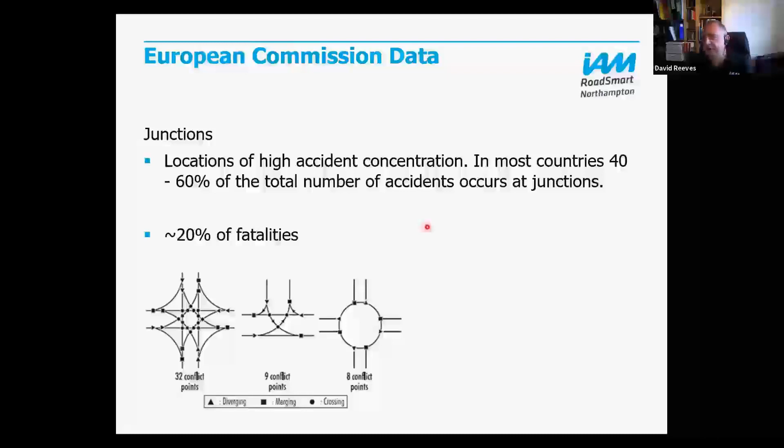It's quite an interesting figure that 60% of the total number of accidents occur at junctions. This is almost no surprise to us IAM-wise, because it's one of the main hazards we consider when teaching people. The interesting other statistic was 20% of fatalities. So although there's quite a high number of accidents, they don't always cause deaths, and that kind of makes sense because they tend to be lower speed, not always, but tend to be the sort of thing that causes injury or just damage only.

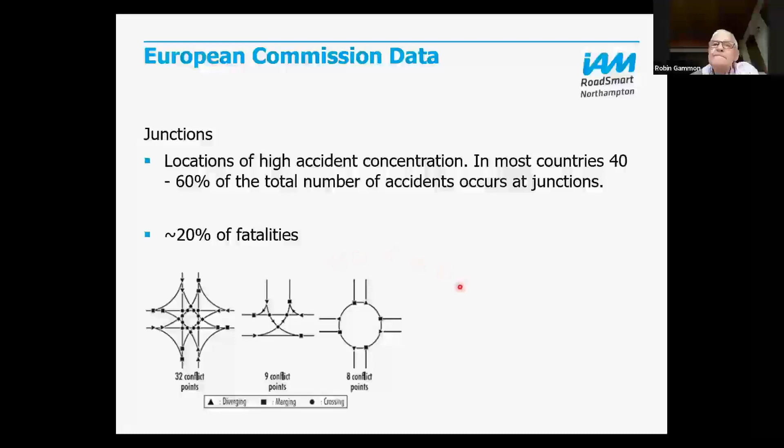Now, from the Roman period onwards, basically we have crossroads and T-junctions and variations on a theme. And for lots of years, the only other thing we could have is a roundabout. They've been around for quite a few years.

From a design point of view, they look at how many different ways on a given junction you can run into somebody. So a basic crossroads like this comes up with 32 conflict points, whereas a T-junction, a three-way junction, has about 9 ways of running into people. More about that in a minute.

This means that over the years, more weird and wonderful ways have been designed to try and limit some of these conflict points.

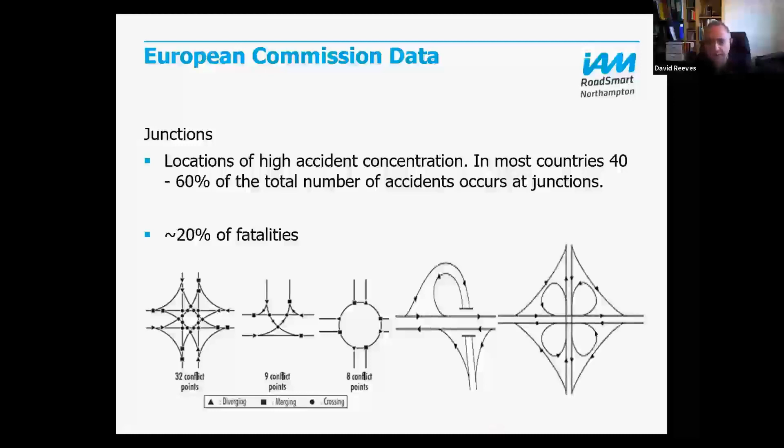Now, it's worth looking at this for a moment. I, on purpose, am taking the simplest one of these conflict points, which is the method that forms the basis of how road engineers start modeling junctions and traffic flows and so on.

So let's imagine here's a bog standard T-junction. If you're going from left to right, you can go straight ahead or you can turn left. Please ignore the slightly dodgy graphics on this one.

Now, of course, when you're pausing there or slowing down to turn left into that side road, somebody could hit you from behind. Alternatively, you might drive into somebody that you haven't seen until you turn the corner. So a lot of what we do in IAM is mitigation for that. It's checking your mirrors, slowing down, signaling, moving down into another lane, getting out of the way to mitigate that risk.

Obviously, if you're going the other way, same sort of thing, you could go straight ahead or turn right into that lane. And the same sort of thing, you could be hit from behind while you're waiting. So again, slowing down, signaling, moving your position and so on mitigates that.

We're also crossing the other lane, so there's now a chance you get hit by a car coming that way. And of course, if you're really unlucky, you could hit the other car that's just turned in.

And then you could be coming down this road, and you can go left or right. If you're going right, you've got to cross the path of other cars, intercepting that one. So there are a number of different places with potential to hit other vehicles, and that's what they call conflict points. That's how they assess the junctions.

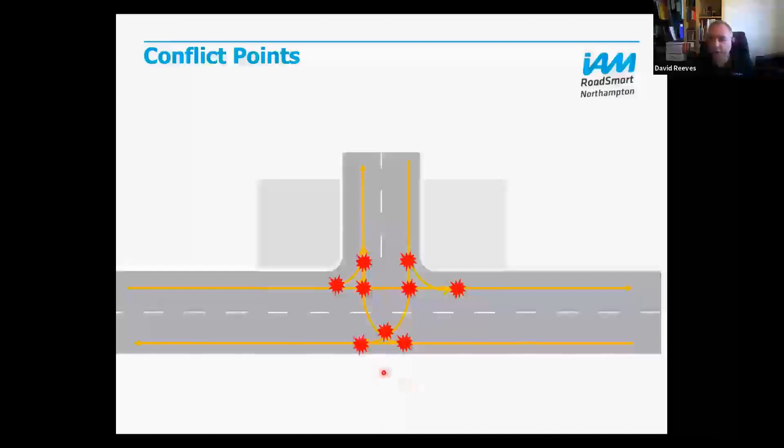But essentially what we're doing—we're not traffic engineers—what we're trying to do is change people's behavior to mitigate all of those different risks. The main ones we've seen are being aware of other road users, good observation, appropriate signaling, and slowing down. But it all comes down to observation largely.

But we can't completely mitigate those risks of other people. Now, a lot of it, though, is done in road design, and I'll come back to that in a moment, but it's worth just looking at that idea.

As I say, I picked this because it's the simplest one. When you start looking at complex roundabouts, they get horrendously complex as they work out all the different ways that you could come into conflict with somebody.

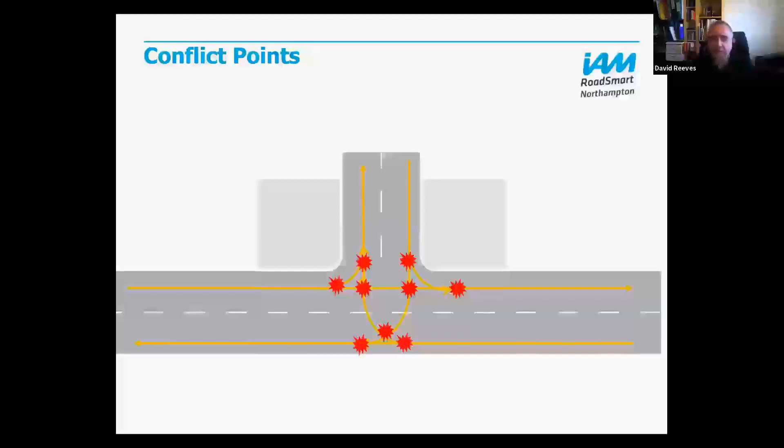So what do we do? Right, worth reiterating the system—I know, or hope you all know this already. I lifted this slide from one of my earlier ones, and with the system, information, position, speed, gear, and accelerate, we've got a kind of 2-for-1 deal for you.

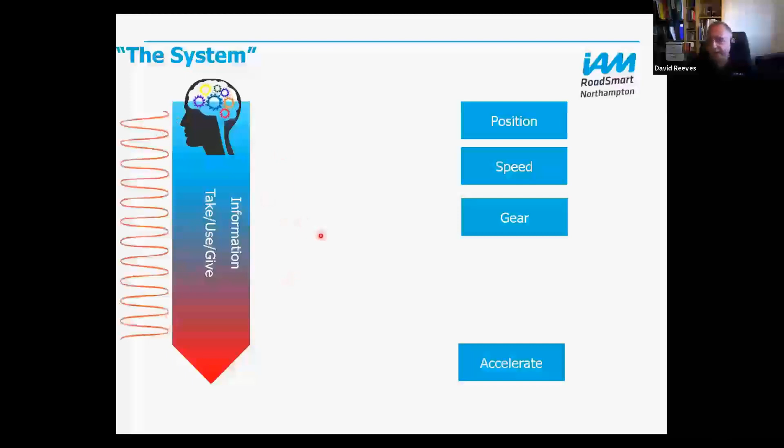It's almost like we've got two different systems going on simultaneously. The first one is taking, using, and giving information. This is very cerebral—it's going on in your head. You're constantly thinking about this. It's high frequency in the sense that for any given hazard, this is going on and on and on. You're cycling around, looking, picking up new information, and using it and giving it.

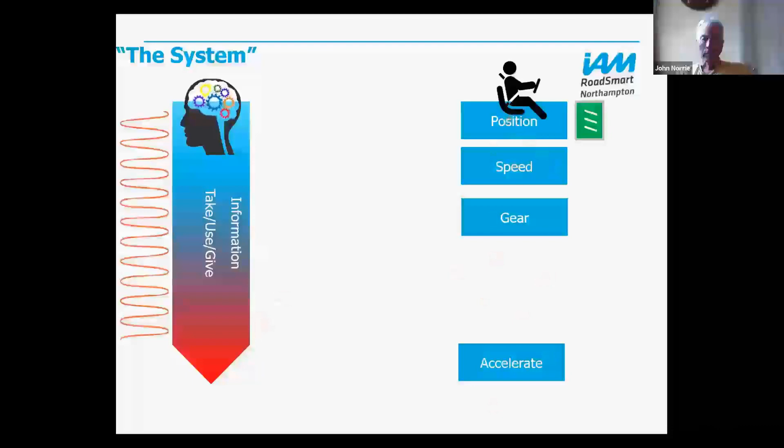Whereas this one is about car control. This is about changing the car's position, its speed. It's related to how far away you are from the hazard and what else is going on. Of course, it's being fed by information that you're taking in. This will control some of this, particularly when we're talking about roundabouts and junctions. But it's lower frequency - it might be that you only use this bit once per hazard. There will be occasions when another hazard occurs while we're approaching a roundabout or junction, and we need to restart this process. But this is typically once per hazard.

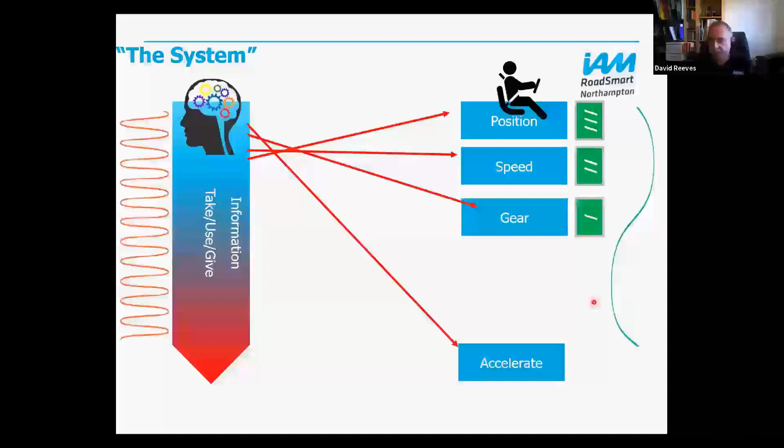Okay, quick recap of the system. We all kind of know that, but it's worth reiterating where we're coming from. This is what it says in the handbook that we should teach our associates. There's a lot about information, and I'll come back to that in a moment. But then it talks about adopting the appropriate position without causing others to alter course or speed unnecessarily, adjusting our speed appropriately for the hazard, changing gear, and so on.

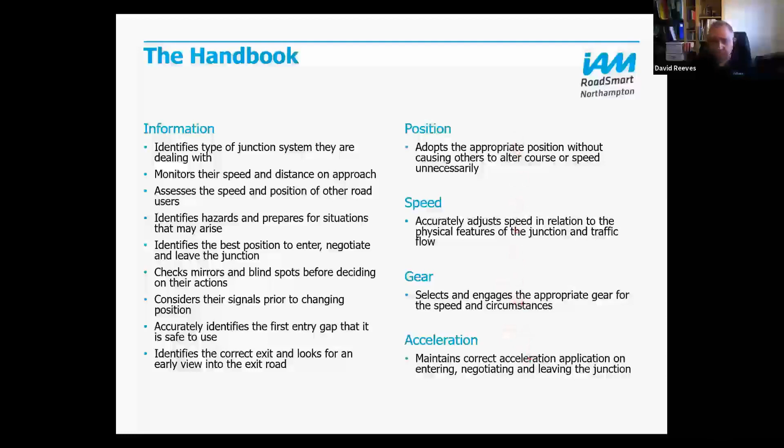This bit is fairly straightforward, I would suggest. The main problem with this is people leaving it too late, and so we tend to work on that in the practical sessions - I'm not going to dwell on it here since it's very much a practical subject. It tends to be people leave it too late. Once we've got them doing it in the right stage - getting the position earlier, changing their speed in good time, and braking effectively - they've got time to change gear and everything else flows. But I will come back to this other stuff in a moment.

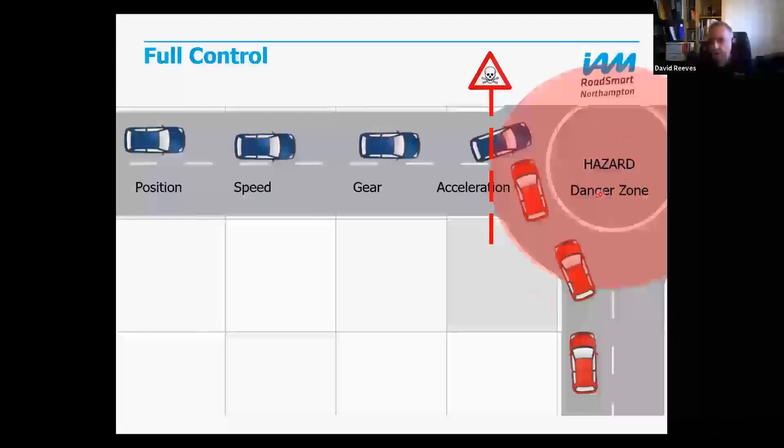Briefly looking at that again, I'm reusing one of my earlier slides. As we approach a hazard, which I call the danger zone - this is the minefield, this is the danger area - what we're trying to impress on associates and trainees is that by the time we get into the danger zone, we want to have maximum control of the car. In other words, we need to be in full control. We need our hands back on the wheel. We need to be in the correct gear, a flexible gear, so that we can adjust the speed, accelerate, decelerate a little bit, whatever we need to do. And we need to be at the correct speed.

Now, we know all this stuff, but it's a question of doing it at the right stages. In order to be at the correct speed as we come in, in the right gear, then we must have slowed down back up here. We must have been in the right position up here. And that's what we deal with in the practical sessions.

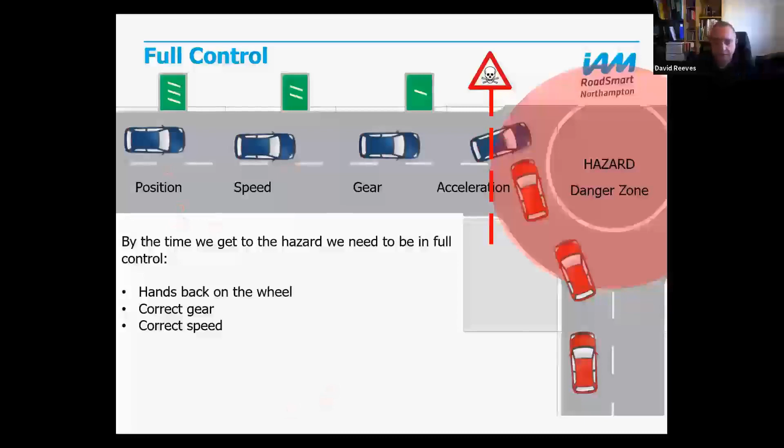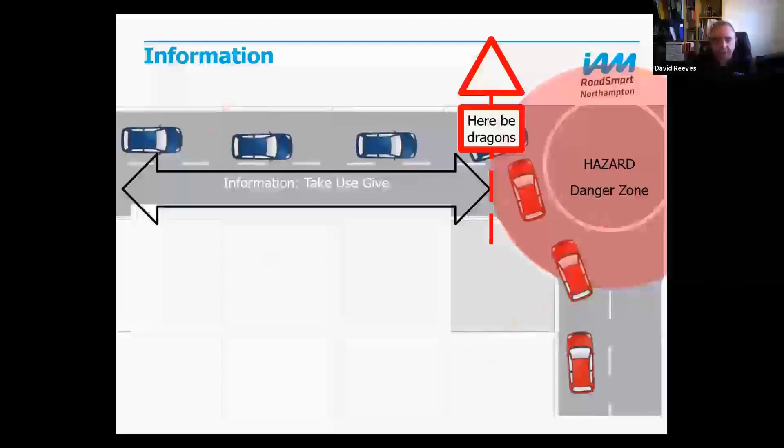On the other hand, the information stage is happening all the way through. When we spot that there's a hazard coming up from back here, we don't know all the detail - we can't know all the detail. It's like one of those old maps that says 'here be dragons' - we really don't know what's going to happen at that stage as we start to take in information. But by starting early, it gives us more time to anticipate what is likely to happen, prioritize any other hazards that arise, and decide what we're going to do.

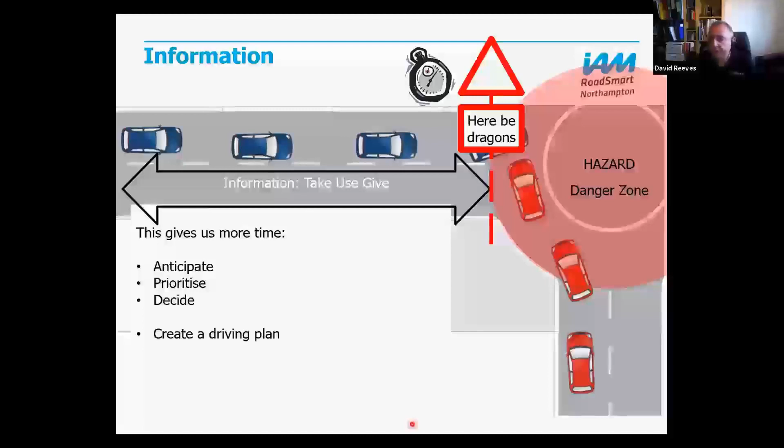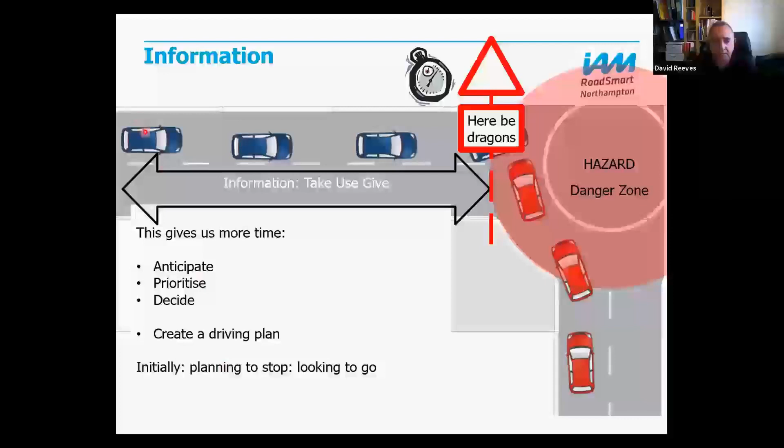Effectively, we're creating that driving plan of what we're going to do. When we start up here, though, we've got very little to go on, so hence we get to that - initially we're planning to stop. We may well have to get here and stop because of the traffic on the roundabout. Until we've got appropriate information, that's all the plan we have. But as we gather more information, then we might be able to look at the traffic flow and so on, and recognize a gap is going to be coming, so we've got an opportunity to go. But our default plan from back here is planning to stop. Okay, we've all seen that sort of thing.

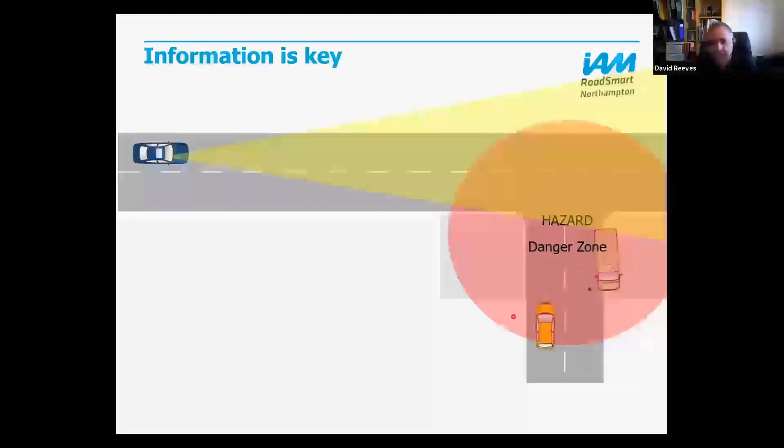So immediately in my plan, I think, okay, I'm going to meet a hazard in here. This black dot is meant to be a person walking back to their van to get in it and open the door, but it's hard to see. I can't see that person, nor can I see this yellow car approaching the hazard. So from back here I can create a plan, but I'm going to have to update it as I get nearer.

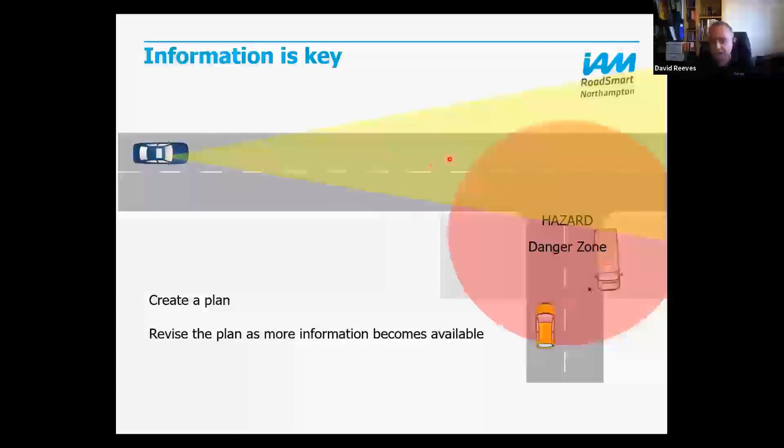Now back here, I know about that one. And the main decision I can make at this point is I'm going to make a late decision, because this is a kind of closed junction in terms of visibility, I can't see into it. That's something I can note early on. We encourage associates to look and say, can you see into it or not. If you can't, you are going to be making a late decision.

So getting people to spot open or closed and predict a late decision is one of the things we can encourage. But again, it's planning to stop. If I can't see into that until I get to here, I may well have to stop before I can do anything. What I can't do is plan to go sweeping around the corner head on into the yellow car, because I just don't have the information. So again, planning to stop, looking to go, different sort of junction this time.

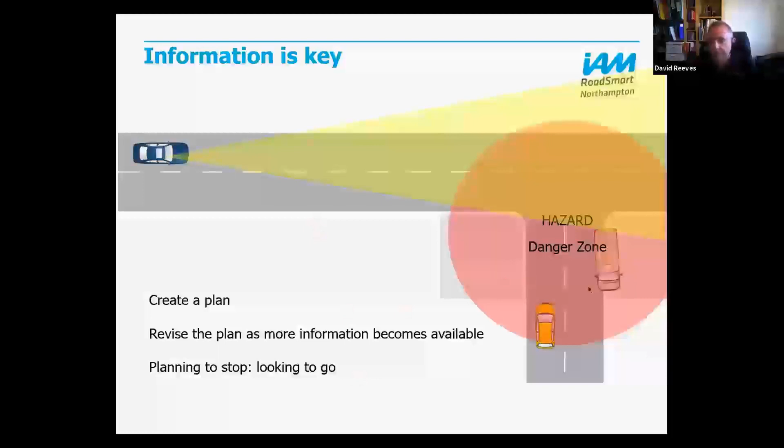Now, a large chunk of it, well all of the section in the handbook, is to do with roundabouts. So it's worth reiterating this just a little bit. And I would say that most people who come to IAM, with a few very notable exceptions which tend to stick in your mind, are okay with positioning on roundabouts. Not universally true, and I can picture some hairy moments with one or two people, but generally true.

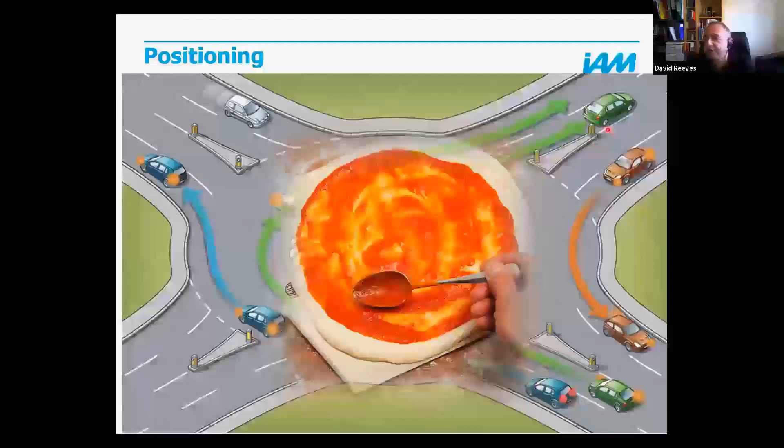So if you're turning left, stay on the crust, stay crusty. If you're going straight ahead, approach in lane 1, stay on the crust and off there. Only if you're turning right do you approach in the right-hand lane, across the crust, into the tomatoey bit, through the tomatoey bit, but then straight onto the crust again before you leave. What she's emphasizing, I love that description.

What it's emphasizing is, if you're doing that, you're changing lanes. And those are the sort of conflict points we saw earlier. So we're often stressing mirror checks and so on as we cross those lanes. And that's the most important part with this.

Other things that we might explore with trainees are use of signals. We always say, well, we'll give a signal if it benefits somebody. So who does it benefit? What about this green and the blue car? There, blue's not indicating, but green is.

Let's take another one. Brown there, nobody behind him. Who does it benefit if there's nobody behind him? Well, actually, it might benefit this green car because they're waiting to pull out. If they know for definite he's going left, that's useful.

I sometimes find associates are thinking in terms of the people behind them, not necessarily registering that the indicators on the front of the car are quite useful as well in some cases. But there's another concept here too, if you think about observation. Imagine you're the brown car, and we've already said the brown car's indication is useful to the green and the blue one because that helps them pull out.

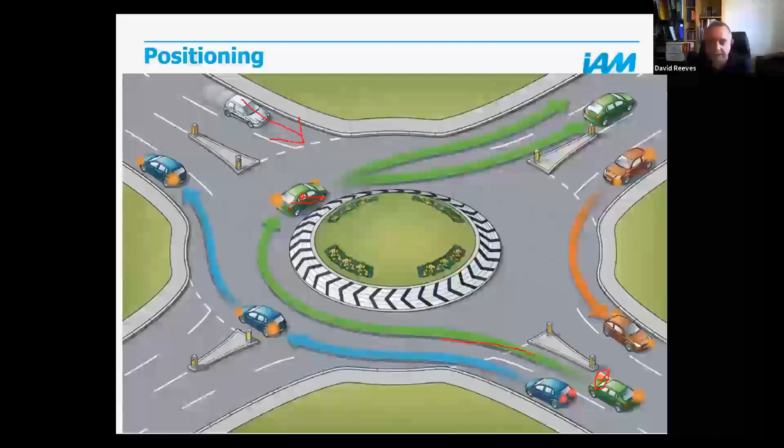So looking for blockers, this is something else we can encourage with associates as part of that observation we're doing.

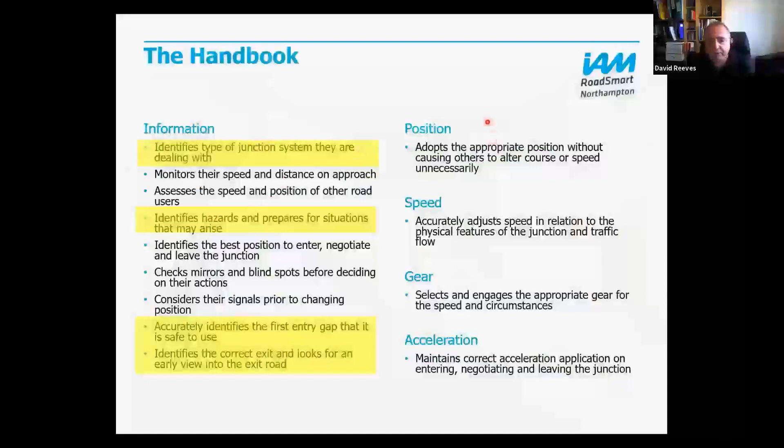So back to what the handbook says. Now when I went through this, there's quite a lot that is simply feeding information into position, speed, gear, and acceleration. That's fine - monitor their speed and distance on approach, assesses the speed and position of the road user, etc. I'm not going to focus too much on that because that goes with what we're doing and is part of the practical part of it.

But what is interesting, I thought, was some of the other bits. I've highlighted them in yellow: identifies the type of junction system they're dealing with, identifies hazards and prepares for situations that may arise, accurately identifies the first gap, and so on. These are the core bits that I think are specific to this.

Now the first one struck me as slightly odd - identifies the type of junction system they're dealing with. I thought, well blimey, if they can't work out whether it's a crossroads or a roundabout or a T-junction, I'm not sure they should be driving, let alone advanced driving. But then I kind of dug into it a bit more.

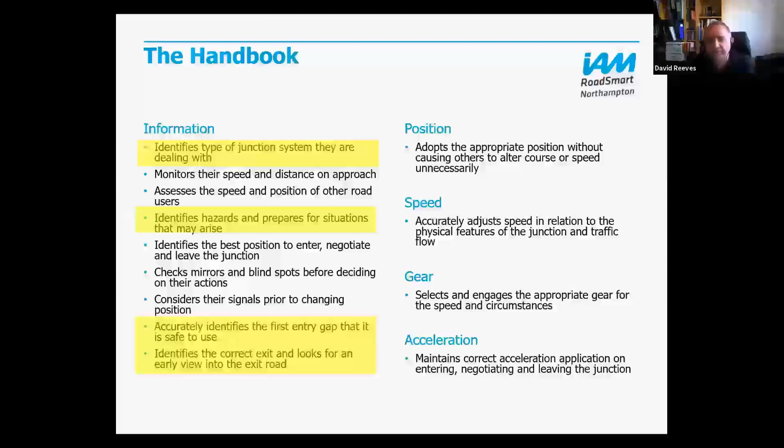At this point there was a great danger of the whole presentation turning into different sorts of road design and so on. I had to do massive editing to take out a large chunk that I'd put in that was then going to take an hour and a half about road design. But...

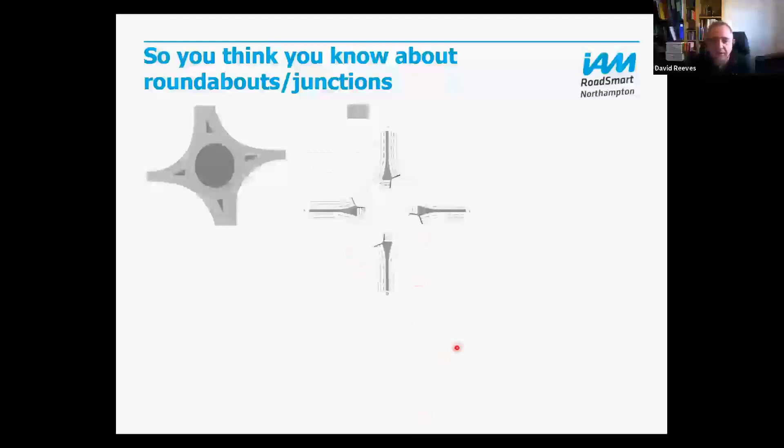But then increasingly we've got light controlled roundabouts. So we come up, there's a set of traffic lights, we get held up for a bit, and when it's our turn we go to the next one, then we get held up again, then again, and eventually it releases us and we can go out again.

Now, my son lives in Canada. His partner is American. When she came here, she just couldn't understand why on earth we put lights on roundabouts - why don't you just have a crossroads with some traffic lights? And I thought, I hadn't really got a good answer for that one. But anyway.

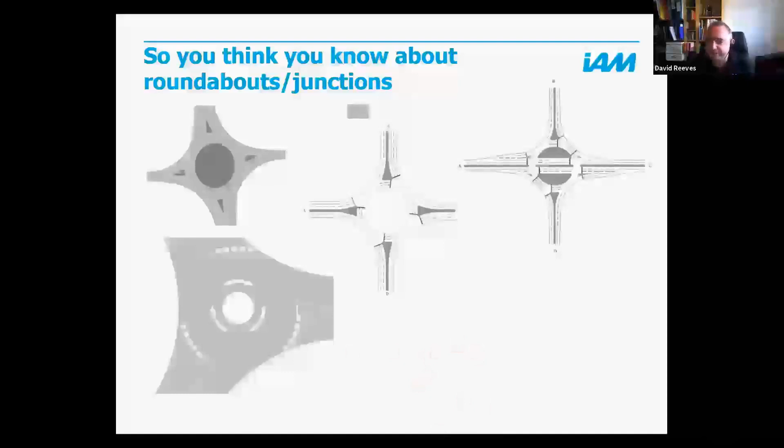Then we've got mini roundabouts. I love these - more about that later, I was very tempted, I could turn into a rant in a moment but I'll try not to. Come back to mini roundabouts - a lot of people seem to have problems with those.

And then we've got multiple mini roundabouts, so you come up to this, and then you've got another bit, and then you're onto another roundabout.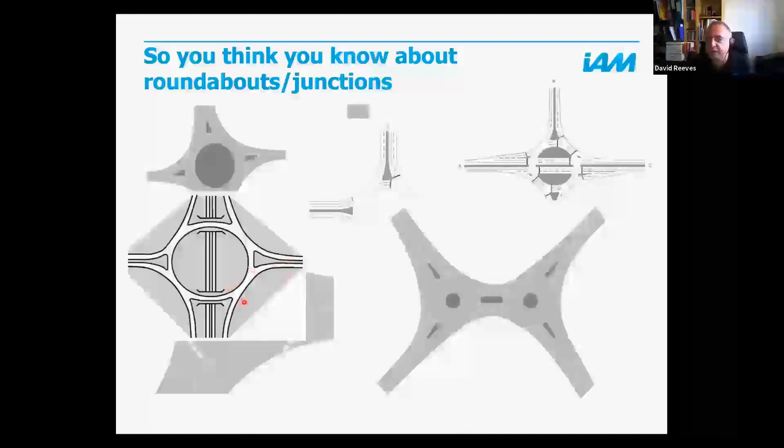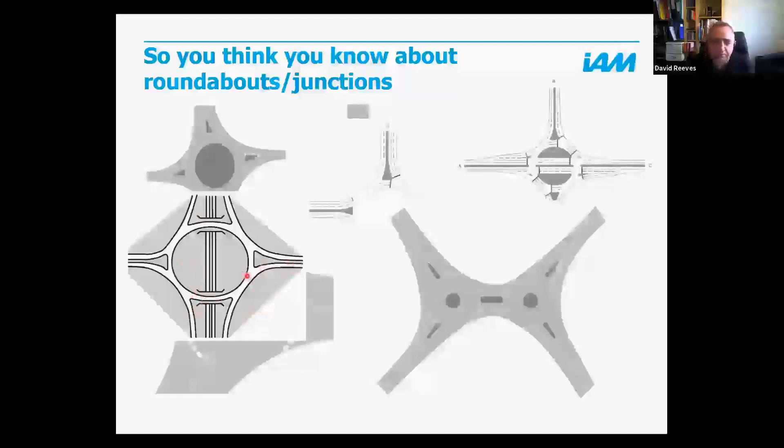And then you've got massive roundabouts, the ones you get on motorway junctions. Huge roundabout, really popular in the 60s and 70s with planners because it was all about speed - you come sweeping along, great visibility of the roundabout so you can choose your gap, sweeping in, hardly need to change speed, round onto the motorway. Worked very well in the 60s and 70s until traffic increased to the point where you haven't got the speed. And it's a pain if you're on a pedal cycle, because you've got to go miles around the roundabout just to cross.

So gradually they're being replaced. A lot of modern ones look like this - a dumbbell, where you go in and there's a little roundabout, straight road, another little roundabout. Slower speed this time, because the design now is about slowing people down.

And then you get all these weird and wonderful junctions. So there's the main road, and you get a kind of T-junction on the other road. And here's a dual carriageway that should have been a crossroads, but to separate the crossing points they've staggered it with a crossing point in the middle.

And then there's Spaghetti Junction. If you're mentioning difficult junctions you've got to mention it, it's in the rules. Which, at the end of the day, is a kind of crossroads - just an amazingly complicated one with a bit of a T-junction going on as well.

Now my point with all that was not to educate you, it's just to make you aware there are an awful lot of junction designs, and it's almost impossible to keep up with all the new versions.

However, I'd suggest that when people come to us, some are keen to improve their driving full stop. Quite a large number who come to our IAM have got issues with confidence, particularly with one item - often it's motorways, dual carriageways, and if it's not that, it's complex roundabouts. Often they've got one in particular in mind, nearly always near their house, or near Sainsbury's or somewhere they need to go, that worries them.

So their problem areas tend to be, if we're talking about junctions and roundabouts, mini roundabouts, multiple roundabouts, or complex roundabouts. So I'm going to briefly talk about some of these - starting with mini roundabouts.

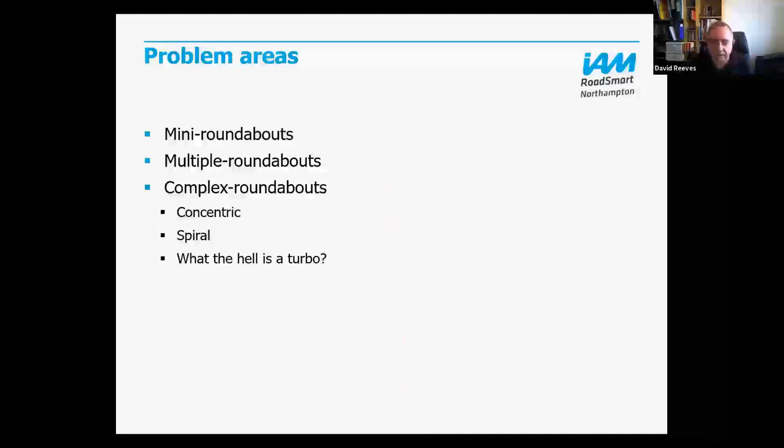This should be extremely easy. I've copied again what it says in the Highway Code: mini roundabouts - approach these in the same way as normal roundabouts. All vehicles must pass around the central markings, except large vehicles which are physically incapable of doing so. This should be very, very simple.

But I've had quite a few associates ask me about this - is it all right to drive over the middle bit? Is it all right to go the other way? And I think, well, why would you even ask that question? But it's because so many people commonly get this wrong.

This mini roundabout is near my house - if you went up there and turned right, you'd get to my house. I wandered around and filmed this video. Just watch this clip for a second.

Now, that was the first one that went past. The next three I filmed as well, just in case that didn't work out - they all did exactly the same. It's actually a very badly positioned roundabout, because it's sort of built into the junction. But let me just play that again.

The only concession he's made is putting his left wheel on the roundabout. Most people actually veer to the right slightly and pass it on the wrong side - inconveniently there's just a blob of paint in the road.

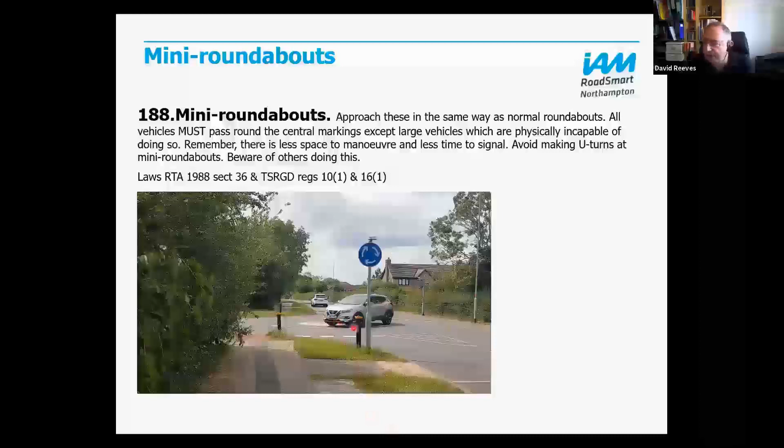Now, actually, I've photoshopped the roundabout out. I'm convinced that's what people see - no roundabout whatsoever. And so actually we've got a double whammy.

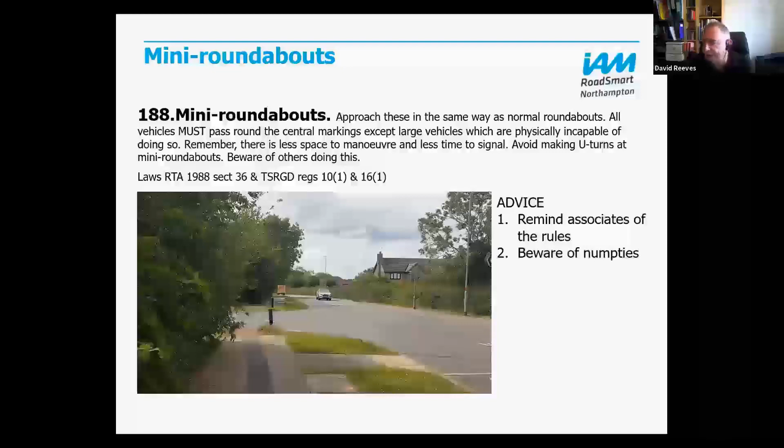Firstly, we need to remind people of the rules, which are very simple. Then we've got to be aware of the numpties doing the other thing - because if I do this properly and go carefully around the roundabout, I'm in great danger of being overtaken by somebody doing the other thing, assuming I must be turning left.

So we have that double thing of reminding them the rules, but beware of other drivers misusing the roundabout in some way.

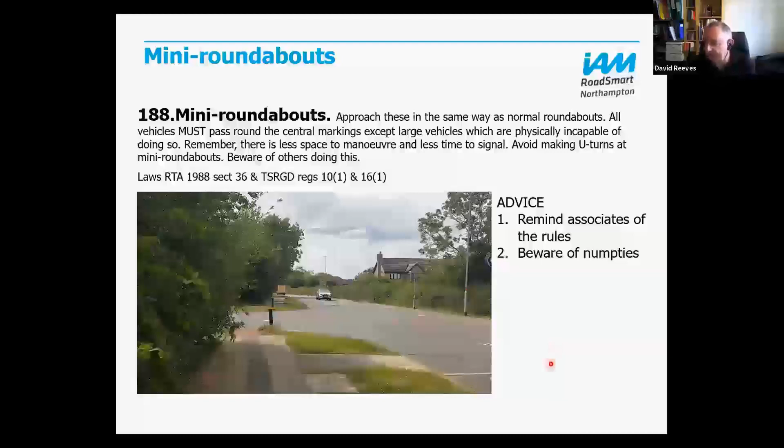Mini roundabouts - we've talked about those. There's one very close to where I live, next door to the one I've just shown you. The idea is you treat them as two separate roundabouts, as it's clear in the highway code. You might come up to this one and it's clear, then come up to the next and maybe something's coming, so you wait in this little stub of road until it's clear before using that roundabout.

This is the double roundabout near me. Here's roundabout 1 and roundabout 2, centered there. This little stub of road is minute - that's the white little island in the middle. It's less than a car's length, probably about 1 meter long. This means if a car approaches, like this white mini on roundabout 1 about to go into roundabout 2, and another car appears, they have to stop on the roundabout.

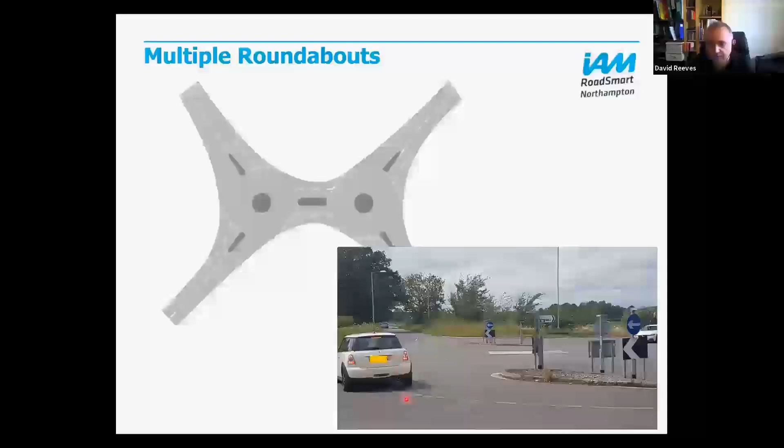This seems to be a massive surprise to other road users that a car is parked there. What we're getting is a secondary hazard of people stopping dead there, quite legitimately, but another car entering doesn't always expect another car to stop dead on the roundabout. They should do, but they don't. So our advice is to remind them of the rules, that you treat them as separate roundabouts, but also beware of numpties.

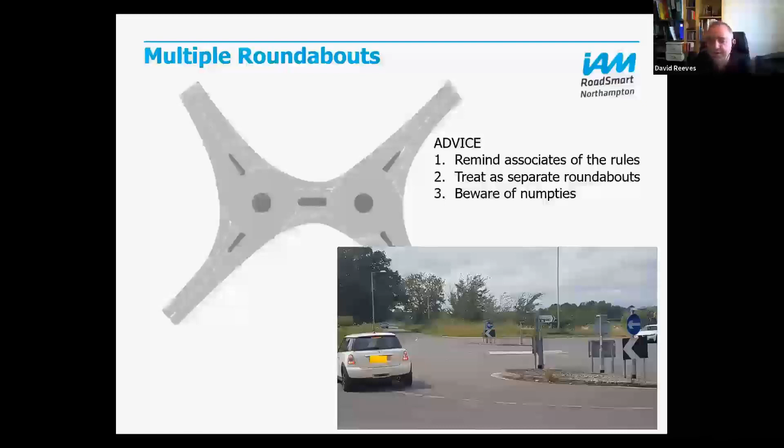There are, just as I said, you can't do the presentation without mentioning Spaghetti Junction. Any mention of multiple roundabouts, you can't do without mentioning the magic roundabout in Swindon. Those of you who've never seen this, it's worth going to Swindon just to play on it.

But I'm an observer for the Swindon group, actually. Are you? Oh, right, fantastic. Yeah, you can ignore my piece of advice coming up in a moment then. But I should have handed over to you to explain it then.

But basically, 5 mini roundabouts around a central circle. If we're coming along here, turn left, great, you just do that. Left at that one, left at that one. But if you're feeling adventurous, you can take any route you like, provided you're legal at each of the mini roundabouts. I think that's right, isn't it?

So you could potentially, and the locals do. Yes, yeah, I think - oh, I haven't been there for years, to be honest. But I know one morning I was going to a customer there, and there was a broken bus about here, which made it quite interesting.

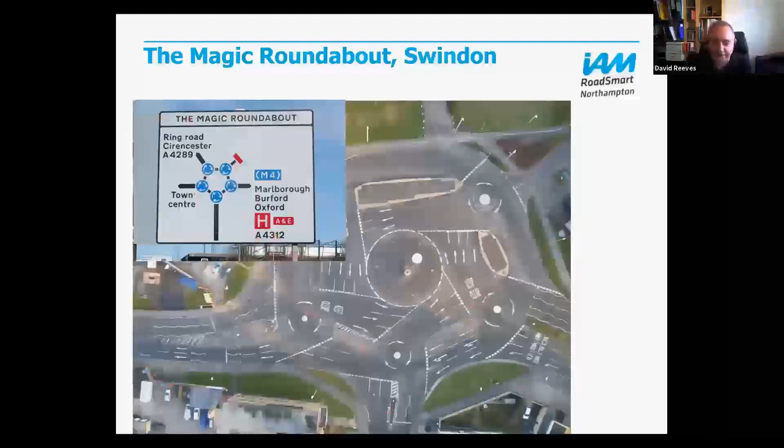But it still works, you could still do things, but you can more or less take any route you like. So we could have gone up here, round here, across here. Where did we want to go? Oh, down there, and then down there. So you can more or less take any route through that you like. Very entertaining - of course, they give you tons of information really helpfully about how you're going to do it. So think, oh, well, it's all about observation and working out where you're going.

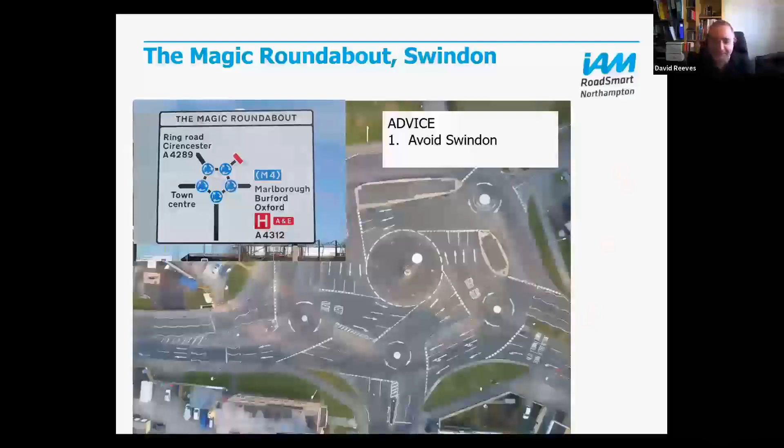So here's my advice, just avoid Swindon. Sorry, that probably doesn't apply to your group. Oh, you can move, I suppose. There's one in Canada as well, of course. Yeah, I think there's other ones now as well. I mean, bizarrely, that's been there since about the 70s, I think, the Swindon one.

Now, the one thing that catches lots of people out is what I've termed newfangled roundabouts - that's all the other ones. Now, this isn't a newfangled roundabout, this is the one we've seen before. You come up to it, outer circle, inner circle - or if you prefer, crusty bit, tomatoey bit. That's it, dead easy, we know about those, we've been taught about them, it's in the highway code. End of story.

But now we get something else. Why has he got that weird graphic? It's a spiral roundabout. If you look at it carefully, you see there where it's point A the spiral begins, and you can trace it round. So it starts in the middle, and it spirals outwards, so that by the time you get to here, you're in the outside lane.

Likewise, there's a second spiral, starting at point B, and again you can trace that one round. Now, there's no standard design for this. There's about 5 or 6 designs when I looked it up, depending on how many spirals. There might be 1 spiral, this one's got 2, and I think you can have as many as 4. So there can't be a golden rule.

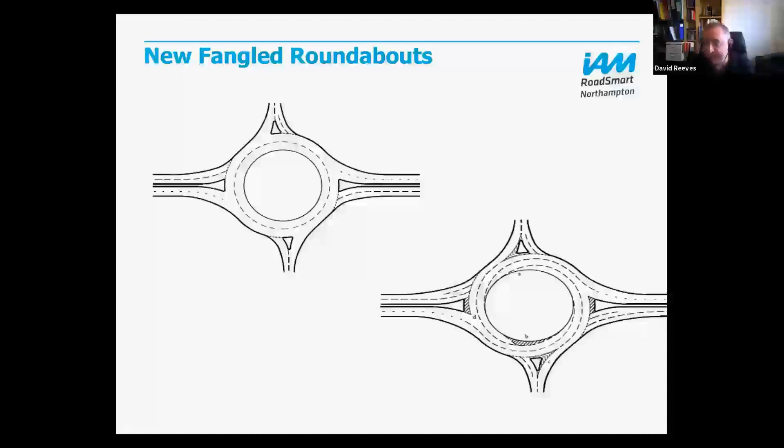Now, for those of you watching it just for the amazing graphics that I produce in here, you've got to watch this one, this is good. And not, oh no, no, this isn't, this has got a bit of graphics on, but it's not that. I spoke too soon there.

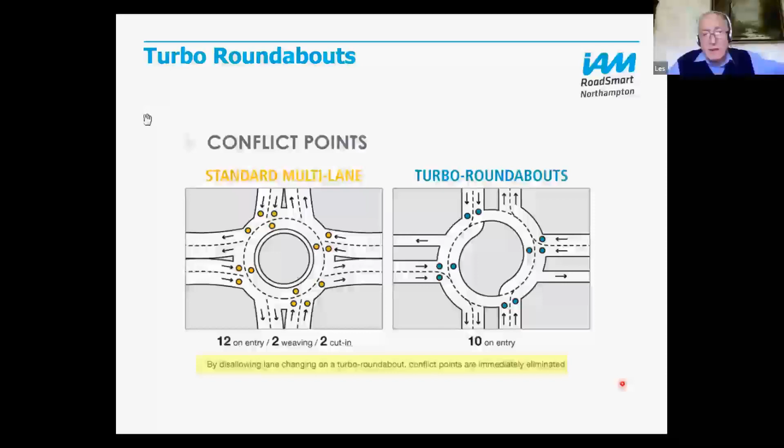This is actually yet another sort, technically not a spiral roundabout, but I think we're going to see more of them. This is called a turbo roundabout. I pinched this whole slide from a Canadian website. Why am I telling you that? Because actually it's a Dutch design and you're seeing loads of these on the continent. I think we're going to get more of them.

Loads on the continent, loads in Holland, coming in Canada. When I tried to see if we had them in the UK, there's definitely one in Bedford, and I guess there will be other ones. It's the only one I could find Googling it.

But this is an American diagram, you can see the arrows all go the wrong way. That's a standard roundabout, and it's joining it from the right. I'm going to do some magic here. So now we've reversed it. So that's your standard roundabout, and look, those are all those collision points, those conflict points we talked about earlier.

There's something like 16. This is the new roundabout, the turbo one. If you're going left or straight ahead, as before, you join in the left-hand lane. You carry on round, you can go off there if you want. You carry on round, but the lane markings stop you going round any further, and it sweeps you off into that.

And in fact, the design in Bedford actually had a wall, a physical barrier to stop you carrying on round. That was the plan anyway, but it was objected to by cyclists and motorcyclists, not unreasonably, because having a 1 foot high wall partway around a roundabout is a bit of a safety hazard in its own right. So apparently they didn't do that.

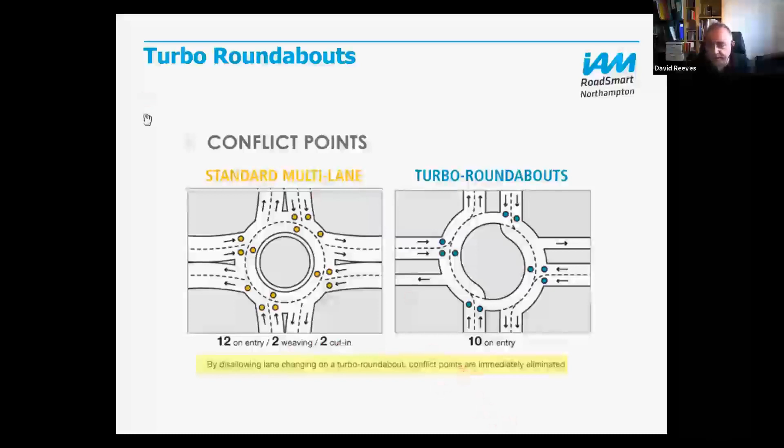And if there's one message for all these newfangled roundabouts, it's try not to change lanes. More of that in a minute. So choose your lane early and don't change your mind. Stick with that lane.

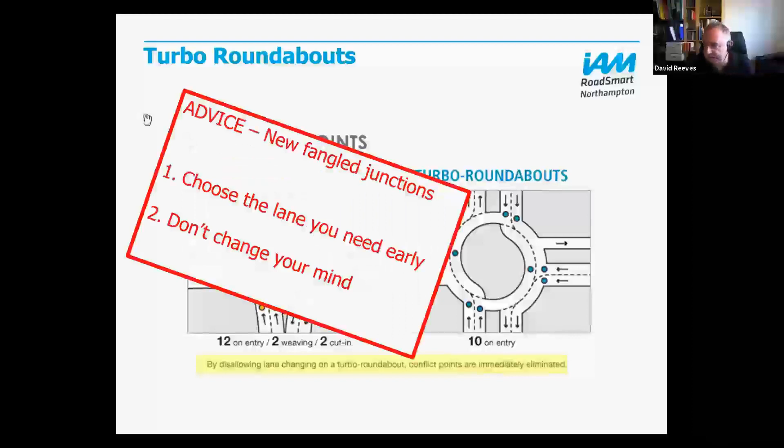Now the amazing graphics, watch, this is good. And hopefully this comes with a sound effect - like a circle in a spiral, like a wheel. No, the sound effect's not going to work. I'm going to go back to that. So I should be singing, you should be hearing 'like a circle in a spiral, like a wheel within a wheel'. Well, we did, but unfortunately not quite. So did you actually hear the original?

What could possibly go wrong? I'll show you what can possibly go wrong. And this is it, and this is what tends to trip people up. As you come into the spiral roundabout, you will see some sort of road markings. Now, there are lots of different designs, so I'm not saying it always looks like this, but on this particular one, it would look something like this.

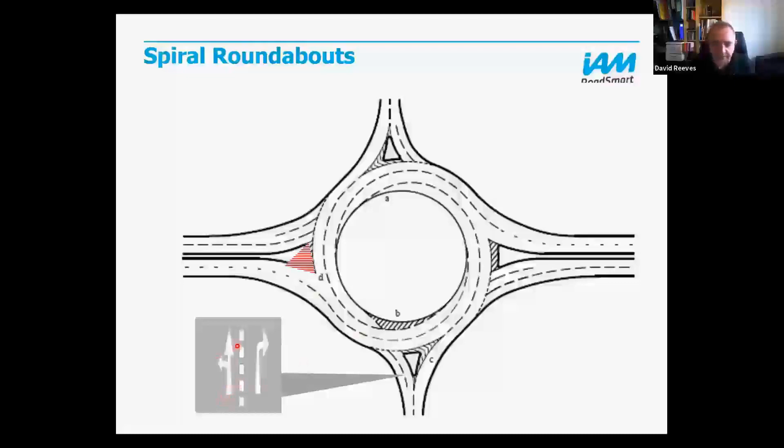If you're going right, you go into lane 2 on entry, and that sweeps you around. We saw that. If you're going left or straight ahead, you do this. We've got a double-headed arrow, okay? That means at this point you get a choice. The road splits - there's a fork in the road at that point.

So you can predict, and you can tell your associates to expect this. If it's a double-headed arrow, you will get a fork in the road. Now this is what it looks like. Those of you from Northampton could probably just about make out the road signs. This is near where we have our classroom sessions - this is the Queen Eleanor roundabout. This way goes on to the main A45 dual carriageway. This way goes on into town and past where we have the classroom sessions.

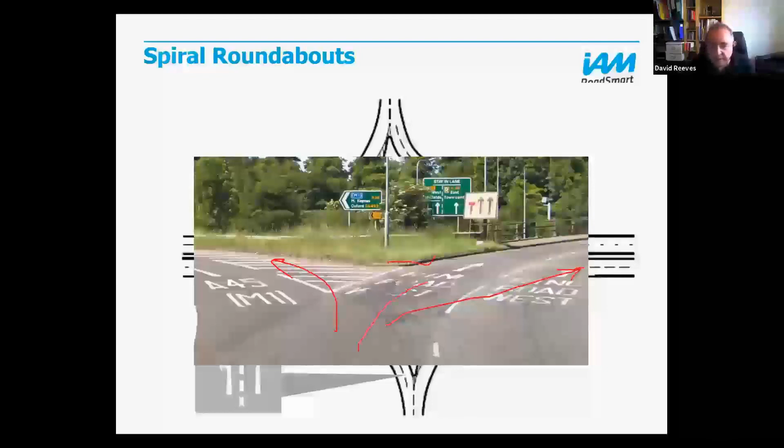Now what happens frequently - it's happened to me more than once with associates - they get to here and it's like the sirens are kind of trying to drag them in onto the other turning, and there's a fork in the road, and they go into panic mode. At that point they suddenly do an abrupt lane change, rarely looking in the mirror first. This has happened to me a number of times, but you have to reiterate: there is the fork in the road, it's perfectly acceptable to carry on in that lane. If you were in the right lane, that's fine.

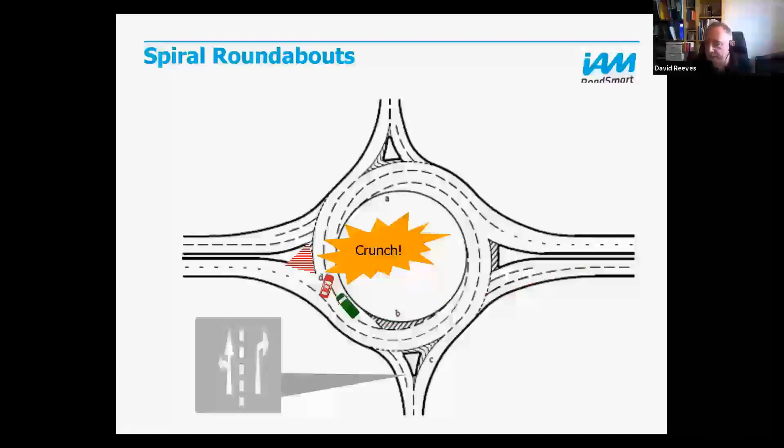So I should get rid of all those lines still on the screen. If you do the sudden lane change at that point, there is a risk of hitting the green van that was coming round as well. So the advice on these ones is: choose your lane you need to be in early, before entry, before you go into the roundabout. This is true of pretty much any newfangled junction system. Don't change your mind - you have to stick with the decision you've taken. And if you've got a double-headed arrow as you come in, you can predict there will be a fork in the road. Don't be fazed or panicked by that.

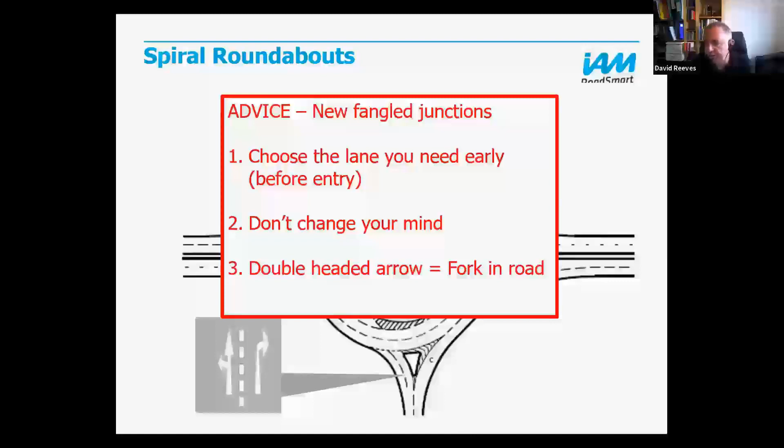I'm nearly finished, but a couple of things in brief.

Newfangled junctions - what they're aiming to do is reduce the conflict points we talked about earlier by avoiding crossing other traffic flows. The way they do that is lane markings, as we've seen, things like spiral roundabouts, turbo roundabouts, other forms of junctions. Physical barriers - we've all seen roundabouts where you've got a left turn filter that physically separates traffic from another, or traffic lights, where you actually close down one flow of traffic while the other one crosses its path.

The other design change is aiming to reduce speed, which is completely contrary to the design principles when a lot of junctions were developed back in the 60s and 70s, when it was about speed of entry. So they do that by putting in traffic lights. That's probably, if I was answering my son's American partner's question, it's a sort of retrofit to try and slow the traffic down a bit.

They also seek to reduce visibility, which again seems counterintuitive, but those from Northampton will recognize that stretch - Mereway, isn't it - as you come towards Tesco's, where they've put actual fences down the middle of the central reservation. So on approach you can't see the traffic coming until you're nearly at the roundabout, to try and force people to slow down. They also reduce lane widths and make roundabouts physically smaller.

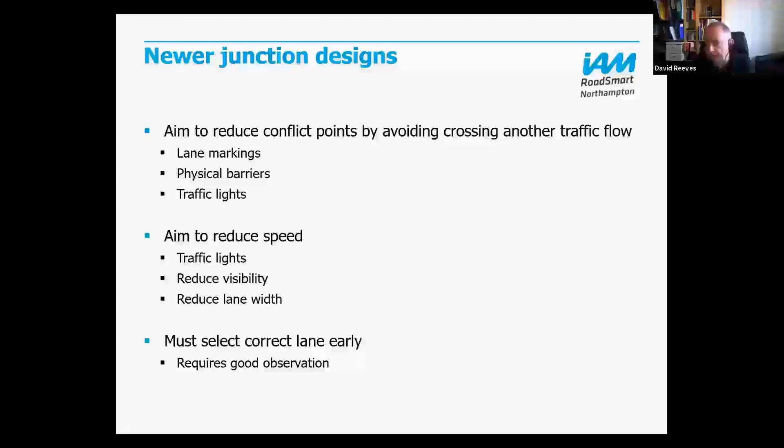The new design specifications try to restrict the size of roundabouts to be much smaller. But if there's one golden rule, it's about getting the correct lane earlier. And back to IAM, it's about good observation - looking at the road signs, looking at the road markings and so on, and picking the correct lane early.

So my final slide - I would say from an IAM point of view, most people coming to us are reasonably okay on standard junctions, but they need refreshers on the less standard ones: mini roundabouts, multiple roundabouts, the various forms of complex roundabouts and junctions. Quite a few of them may never have had any training on some of these things, like spiral roundabouts. It's a kind of thing people often feel quite unsure about.

But if there is a golden rule for all new kinds of junction layouts, it's this: pick your lane early and don't change your mind, I would say. So with that, that's the first phase of it. I've taken rather longer on this, so I'd now like to open it up for questions, comments, any thoughts people have got related to what we've covered.